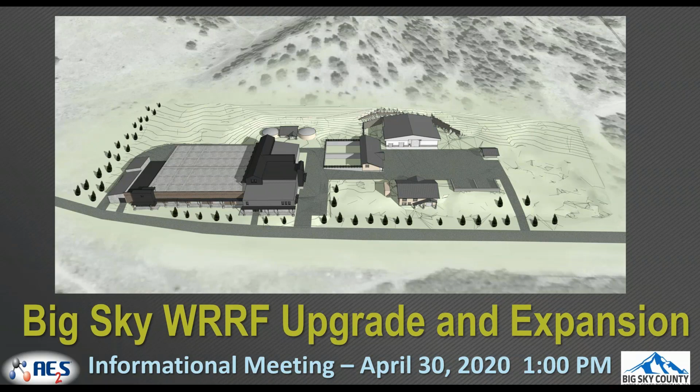Many of you may have seen this in the Bozeman Chronicle. I believe it came out on Monday. I got a call last week from NPR Radio, a reporter there, wanting comment on this complaint that the Cottonwood Law was filing. And we hadn't seen the complaint, so I had no idea what it was about. We eventually got it by mail this week. I was able to find it at the end of last week. So when Perrin called me from the Chronicle, I did know something about it because I had found their complaint on their website.

They also did a video and posted it on Vimeo. They came up here, looks like from the snow, maybe 2 weeks ago, 3 weeks ago, and flew a drone around the Middle Fork and posted this video. This is just a screenshot from that. And you can see on the bottom part of the screen, they say there's an illegal discharge, question mark, the West Fork of the Gallatin River.

On that, you can see in this image, there's a manhole right here. It's part of the area that's thawed. And I'll show you pictures of that later on. And really what we've got here is there's a huge underdrain system that's part of our pond network. And I'll show you the plans for that.

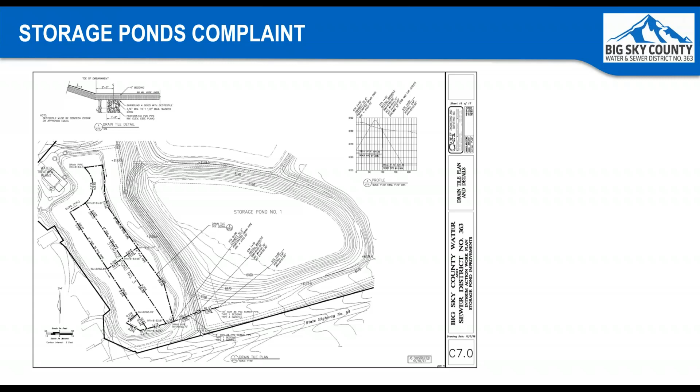Up here you can see this circle - that's the manhole I showed you in the image before. This is a drawing of the second pond, furthest to the west, closest to our office. You can see the black lines - that's another network of piping, part of this underdrain system that runs into a manhole in the dike, flows into the network under storage pond 1, and eventually makes its way out of the system.

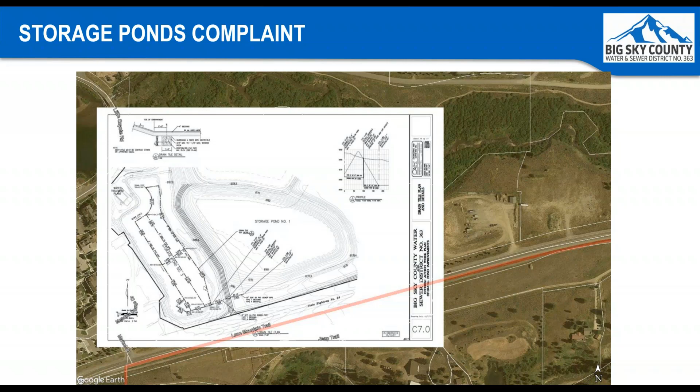So this is the same drawing overlaid on top of the Google Earth aerial image. That's pond 1, and this is pond 2 overlaid. If I draw the network of piping underneath these liners, you can see where these lines are, and the fact that they go out through this manhole, out the side of the berm, down into the Middle Fork.

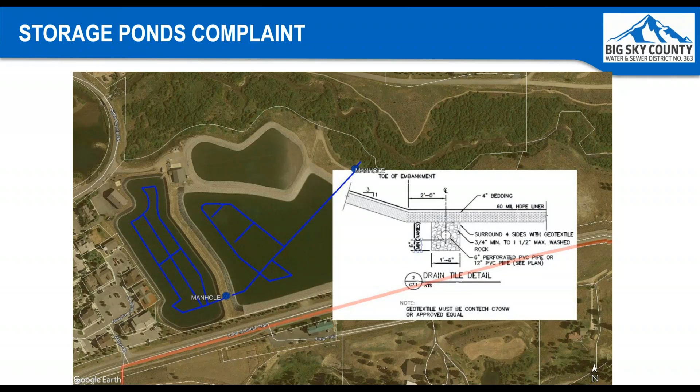This is the detailed drawing of the construction methods for installing these underdrain pipes - a cross-sectional view showing the drain tile detail from when we built this back in the 90s.

Now I've got some pictures of the original construction dating back to '96. This is when we started filling the ponds in '97. You can see these massive liners - it's a 60 mil HDPE liner we're putting down. These underdrains I'm talking about are underneath the bedded areas where the liners went down.

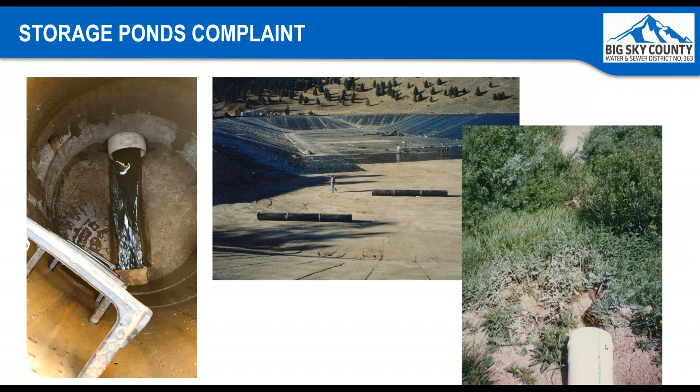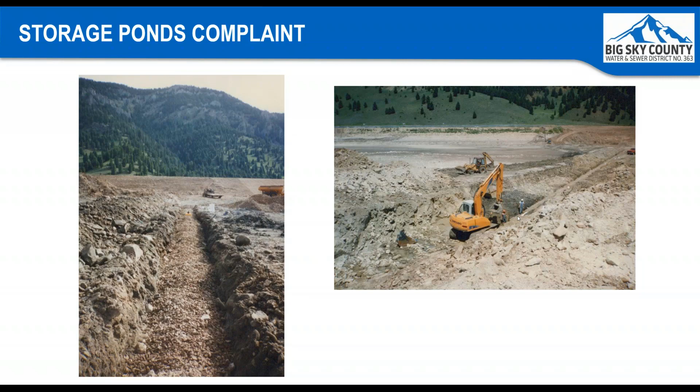These are more construction photos. You can see here, clearly there's a trench with gravel. There's an excavator digging a linear trench. These are all related to the underdrain system construction.

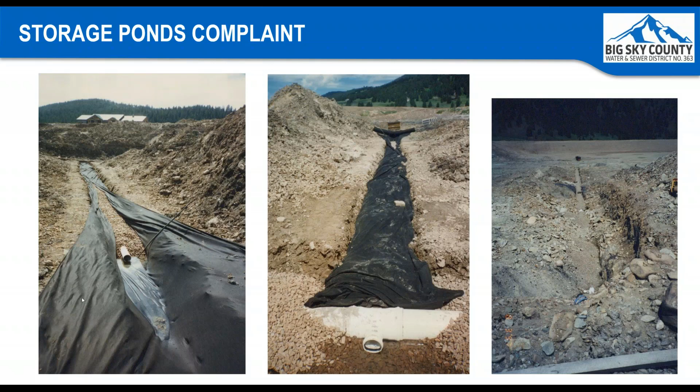Here we are - these are lined with geotextile fabric. This is a perforated PVC. The whole idea for this is that it allows groundwater to come into the pipe. The geofabric gives you a filter around that to prevent sediment from coming into the pipe, and then it makes its way out the back side of the storage ponds.

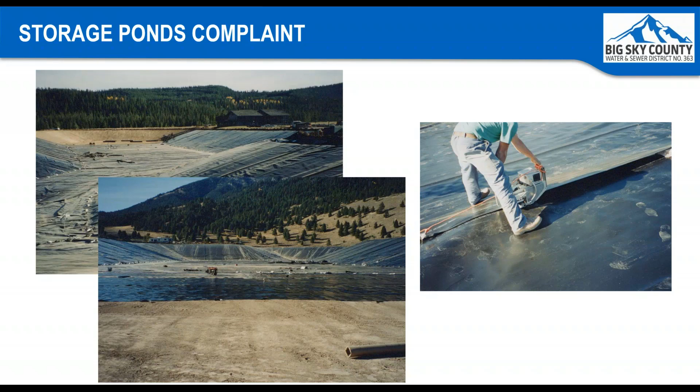Moving along, I'm going to jump to Susan. She's on the call, and Susan, I've got one slide I'll put up. A little background: Susan is our attorney for the Water and Sewer District and has been for quite a few years. She's our general counsel for most things Big Sky Water and Sewer. I know she also represents a number of county water and sewer districts around Gallatin County and other places. We asked her to get involved with the canyon discussions as far as how a water and sewer district could be created in the Gallatin Canyon area. This may be a repeat for some, but we have a few new people on this call, so Susan, if you wouldn't mind walking us through what that process would look like.

Sure, thanks for this time. When you're contemplating creating a new water and sewer district, there comes a point where all the aspects have to be looked at and a path has to be chosen. Generally there are two methods to establish a water and sewer district. The first is to seek 10% of the qualified electorate to sign a petition to create the district. The other is a petition signed by 100% of the landowners that would be within the boundaries.

That all seems really simple, but when you start to ask what's a reasonable boundary for a district, you also have to consider the costs to provide service for that district, because you're going to spread those costs over those lands. Another factor in deciding between a smaller consolidated district with 100% of the landowners versus seeking a bigger district with 10% of qualified electorate, is generally it's a better idea to seek the bigger district. The other factor is how you anticipate growth happening. If you start with a smaller, more compact district with 100% of the landowners, those people bear the costs of getting the services in place, and that's an entire process in itself to get the financing to do those things.

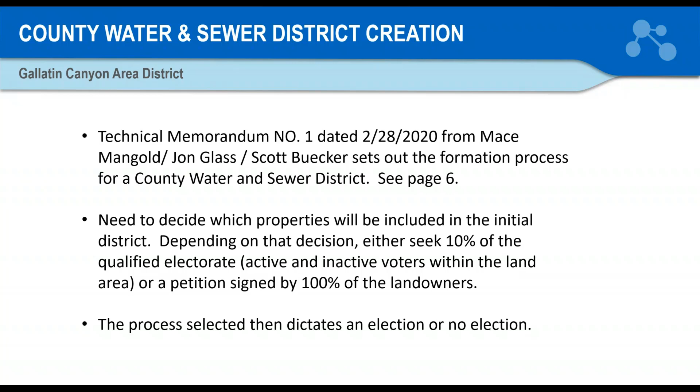Now I'm going to jump down to the frequently asked questions we've gotten, some from individuals at the first 2 meetings we've run. Some of these I can take, some Scott can take. And then after this, we'll get into the election that's going on.

So, Scott, you want to take that first one? Sure. And we've got Brent Bogar to jump in on finance and those types of questions.

One question we've gotten is whether the project is necessary considering the current economic environment—the idea being that COVID-19 has altered the landscape enough that this project can be delayed. That is not the case. The district is about 2 years away, at its typical development rate, from having enough capacity at that plant, in normal years where about 20 to 25 single family equivalent connections come online requesting capacity from that plant. That may change with COVID-19 a little bit.

We don't know yet what's happening exactly, but long term you have to be ready for that to come back, and 2 years is the right planning period. Projects of this complexity and scale take 2 years to build once you start, so there's no float in the schedule. We are due to finish design early this fall, get it out to bid, get a contractor contracted and proceeding on the work in the winter of 2020-21. There's just not any room to alter that.

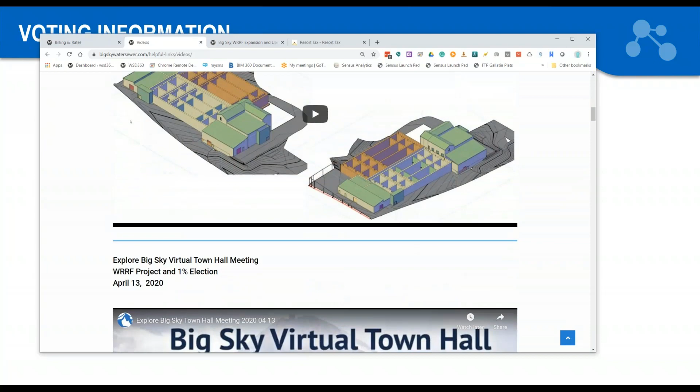There's lots of information on the Resort Tax District website. We've got a few things here I'll put on the screen as well. So as has been the case with every one of these meetings, when we're done, I record the meetings, I put them on our website. So we've got a lot of meetings and videos of these meetings as we've gone through and done these over time. If you click on the times associated, you can jump right to that portion of the video

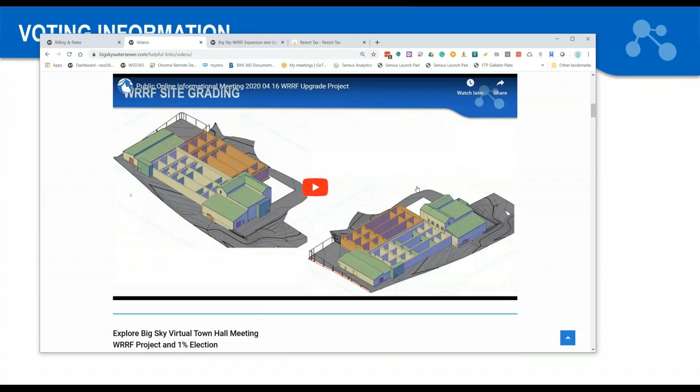within the larger video file. We participated in the Explore Big Sky town hall meeting on April 13th. This video, I actually edited it down for our portion of that meeting, so it's kind of the stuff wrapped around the Water and Sewer District project. This is a video that our architects put together for my board at the last meeting, which kind of walks through what the plant looks like in renderings that you can look at to get a feel for what the overall project looks like.

Let's see, so this meeting will go here as well. We've got a web page devoted to this project where we update it over time with some of these FAQs and questions that come in and try to provide answers to those things on our website. So this was a meeting announcement for the meeting today, and this will be the last one we're doing leading up to the election. Danny's got a lot of good information out on the resort tax website, and there's a page devoted to the 1% for infrastructure initiative.

Some of these posters have been around the community. The Chamber of Commerce recently had a full page ad in our papers up here supporting the initiative as our chamber. And so you'll see some of these things around the community here. Other questions?

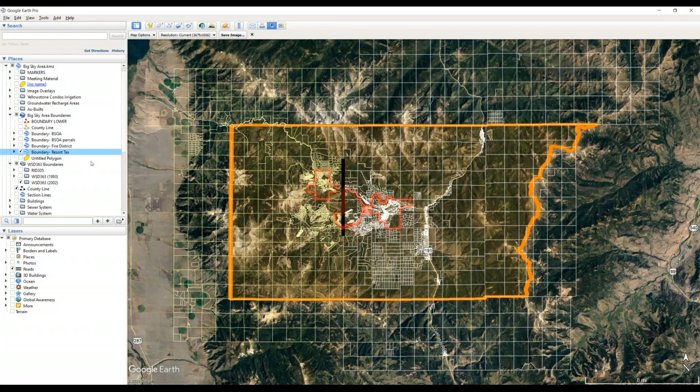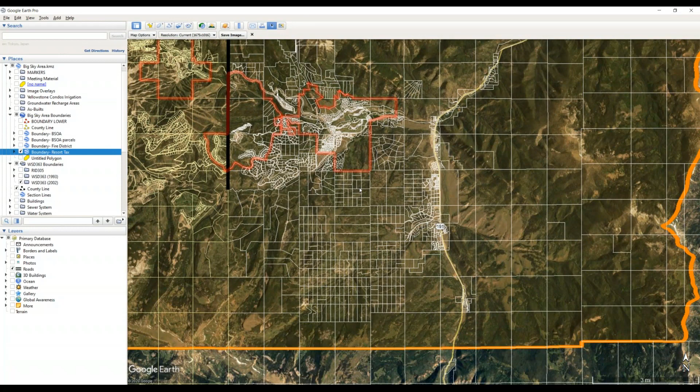The resort tax district boundary looks like that. It's a very big area. It's 265 square miles. We're geographically about 3.7% of that larger area. And again, the canyon's a subset of that, but there's really no political boundary defined by the canyon area. We have nothing in the way of plans or activities to try to expand the district into the canyon. So.

What is the plan for the properties just south of Lone Mountain Trail? Another good question. I'll pull the map back up. I'll show you what that looks like. It's the old Grizzly Flats development, which Tom Leroy did back in the 90s when I first came here. So this is the American Bank property. They have come to the district 2 or 3 times over the years asking to be annexed into the district, asking to be connected to the sewer system over here.

My board has historically been very, very reluctant to expand the district boundary until we expand our treatment capacity. So they've been told, no, we're not going to annex you in. We'll consider it if we get this plant upgrade going where we are able to expand our capacity and disposal options. But at least for right now, they came to us last year, kind of the second half of 2019.

The answer was again, no, let's wait. And if things develop where we're expanding the plant, we'll reconsider. But at least for now, they've been told, no, we're not going to annex you in. They are connected to our water system with a line that goes over to the Meadow Village area or the commercial center. So there is a small service line just for that building.

Problem with that is it's a small line. You can't add additional buildings to that. So if there were more buildings on that side of the road, the water line would have to be upgraded to at least a 6-inch line. And we would probably go 8-inch for that. And you could add more buildings to that.